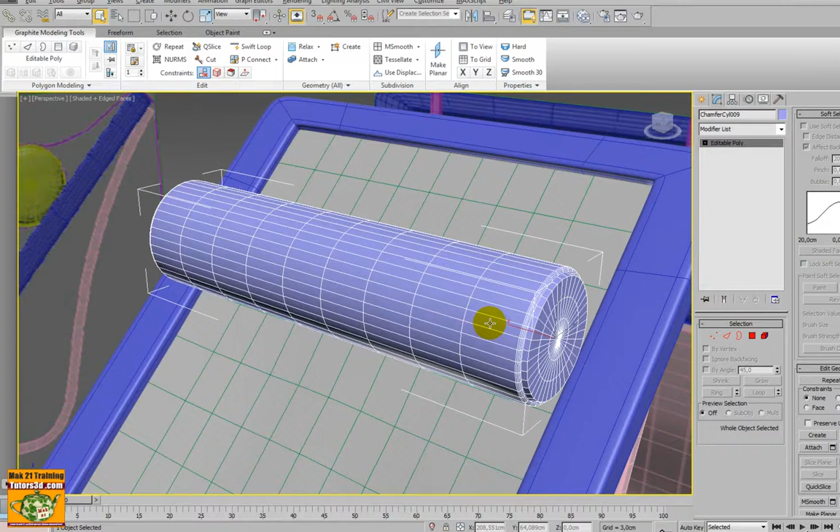I isolate it. We use the tools Clone, Copy. We change the color of the object. We use it as a matrix, then hide the original.

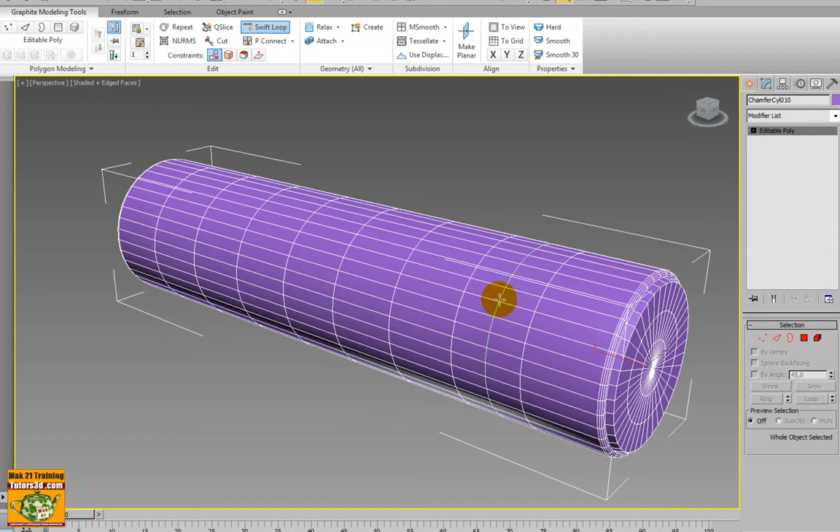We can use the Swift loop. We put it in this position and insert a series of edge.

There will be polygons that are not needed, then I delete it. For example, we eliminate this. We can also eliminate these. We made a ring.

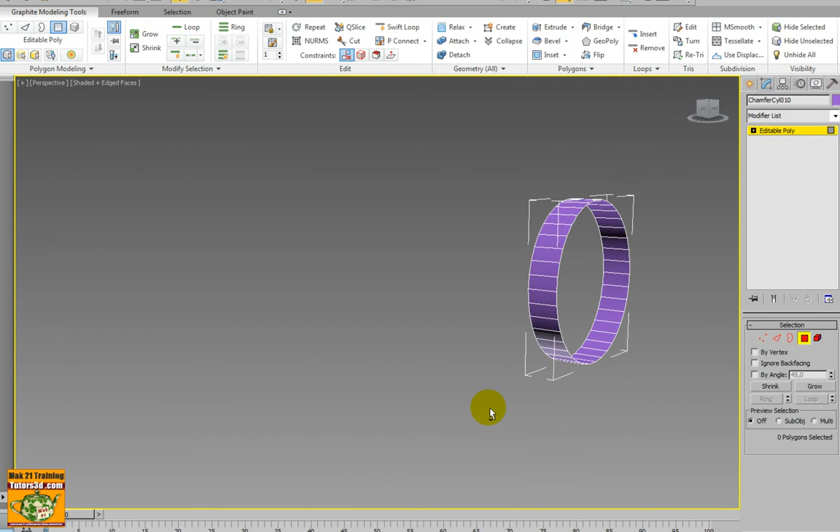Exit isolation mode. We use the command unhide by name. We make visible the original pillow. Here we find our object.

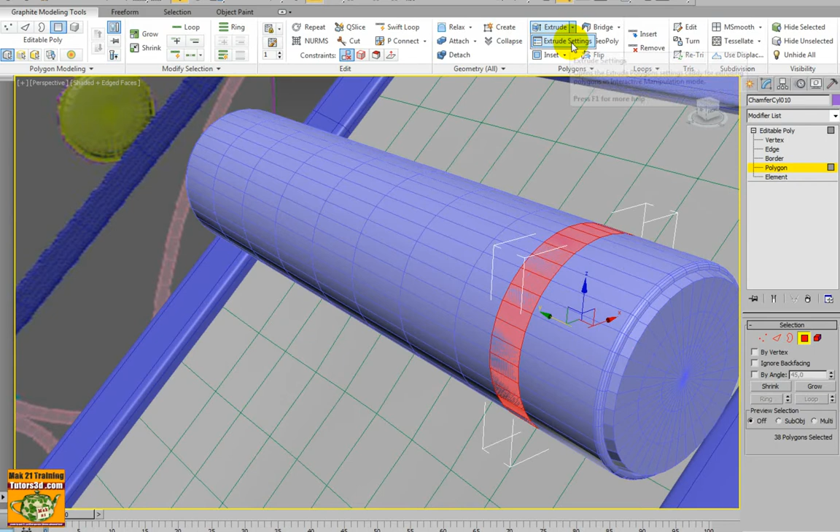Select all the polygons with the keyboard shortcuts, Ctrl+A, and we make an extrusion. At the beginning it is very highest extrusion. Set the local normal, and insert 0.2.

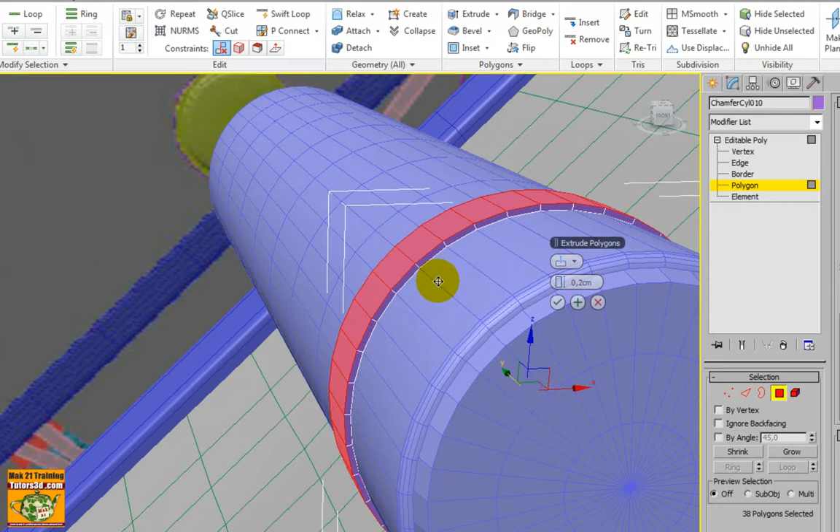Now we see the coefficient for the extrusion. It would be the thickness of the belt. We can do it once, or even several times. If I want the thickness on the segments, we try to insert 3 extrusions.

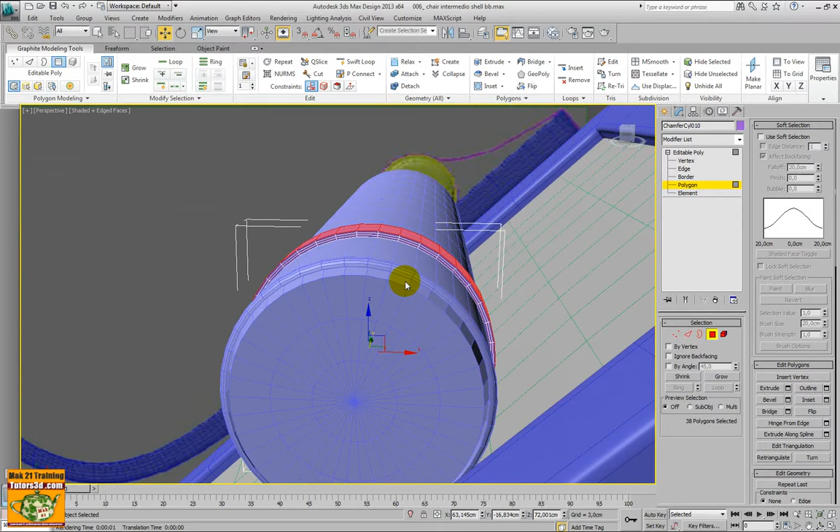Now we need to split this item to create the strap, which stays on the chair. So we do a selection for some polygons.

For example, these polygons. We do it in this position, and we eliminate it. Now we have created a hole.

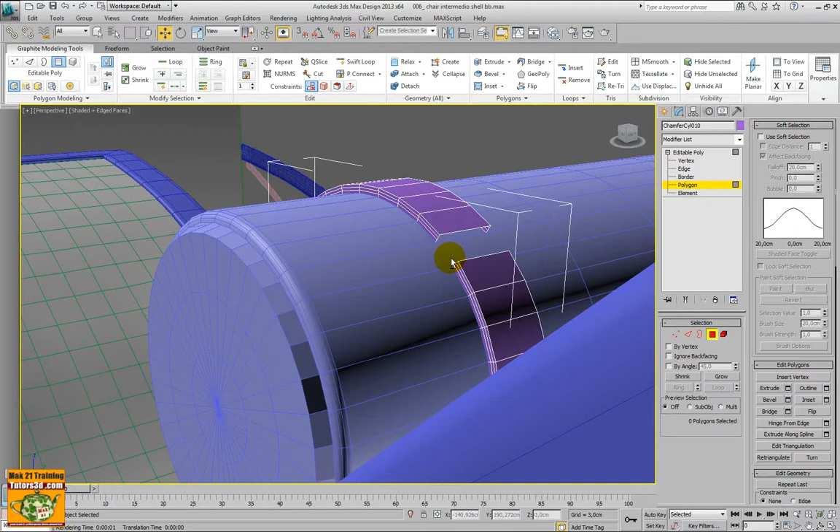We need to close the underside of the belt, before making another extrusion. We need to select the entire profile and then close it.

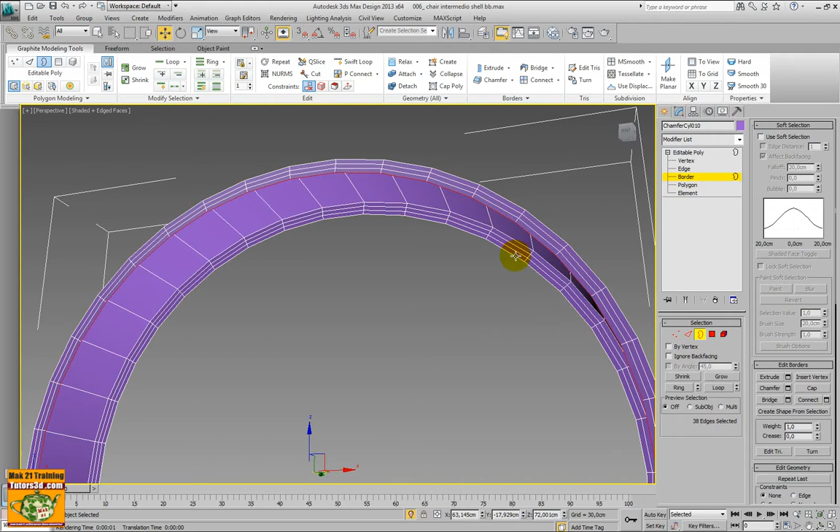We can use the command bridge, and even eliminate the polygons. That are these. Delete.

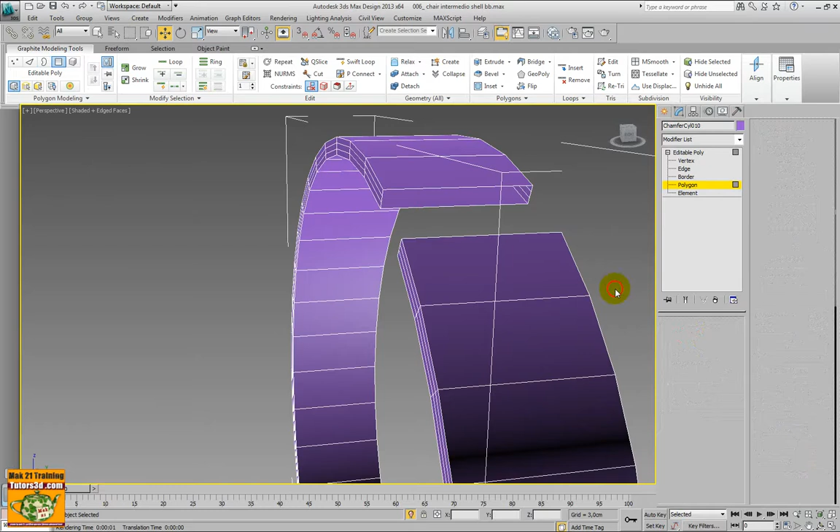Now we can use the border to create the belt. If you move with the Shift key pressed, it creates another set of polygons.

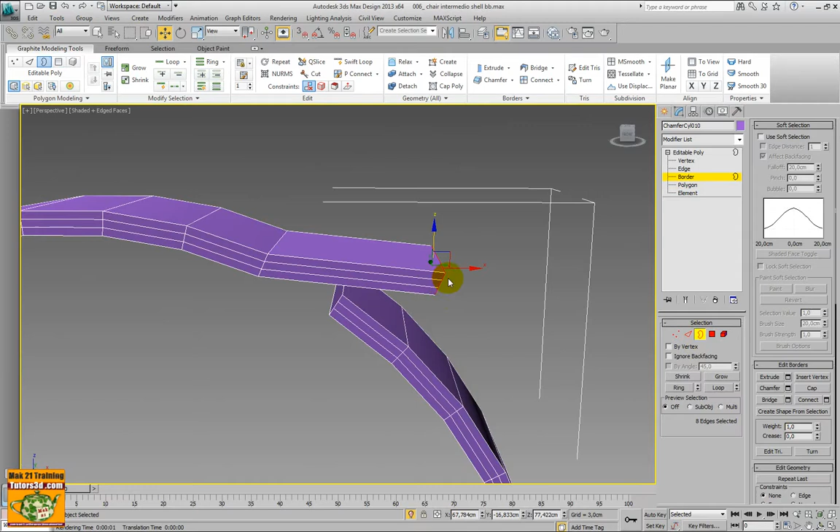The only imperfection of this process is the inclination of the edge, which is not always consistent with our purpose, but afterwards we can rotate it. This procedure is very easy to use.

Now we begin to implement other parts of the belt. We move it, and always use the Shift key during the movement to realize the full shape of the belt.

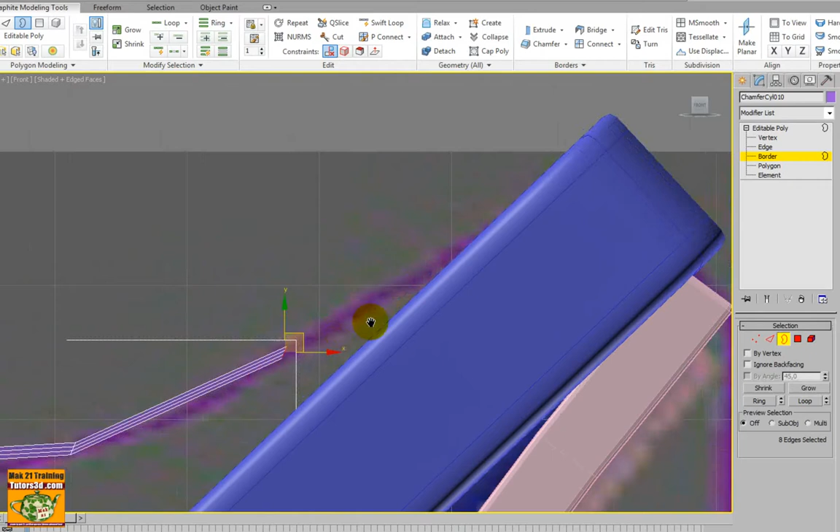At this point we must make a rotation. It is better to move in this way.

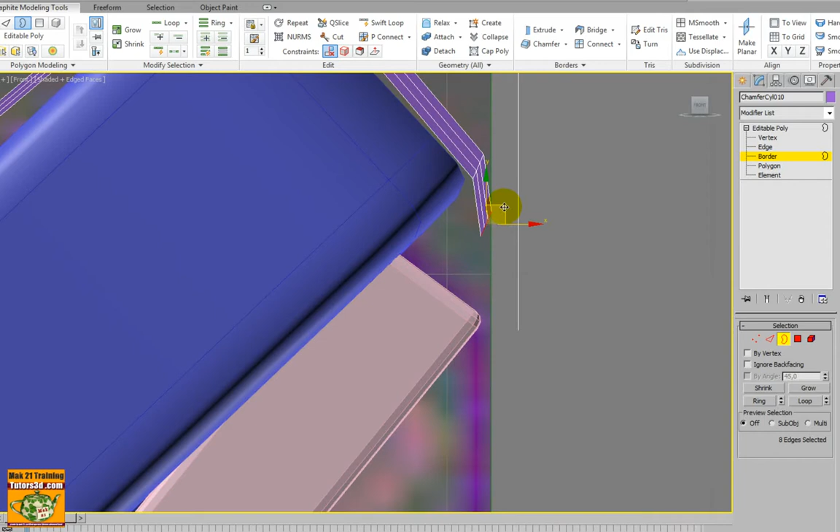When we make the rotation, we must use the correct axis, so as not to deform the disposition of the polygons.

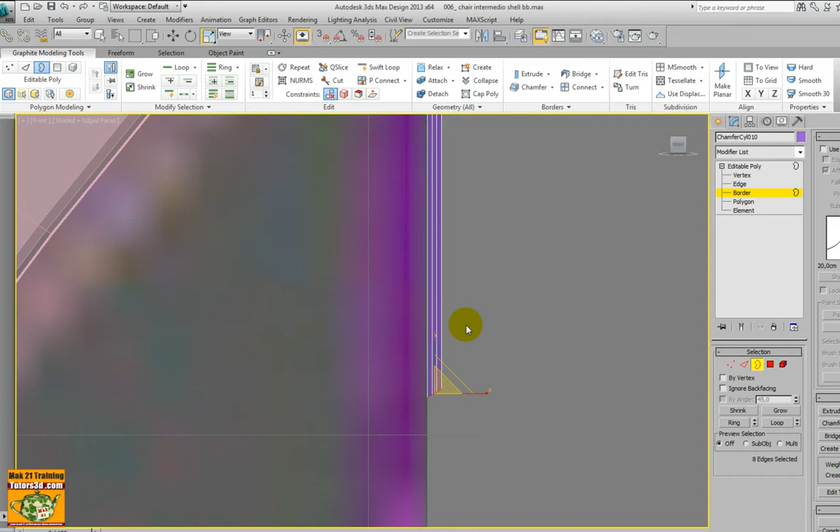We can also use the scale to align the polygons. The scale is an alternative to the command of align, which we used in other lessons. With a scale you need to work on one axis, to align the polygons.

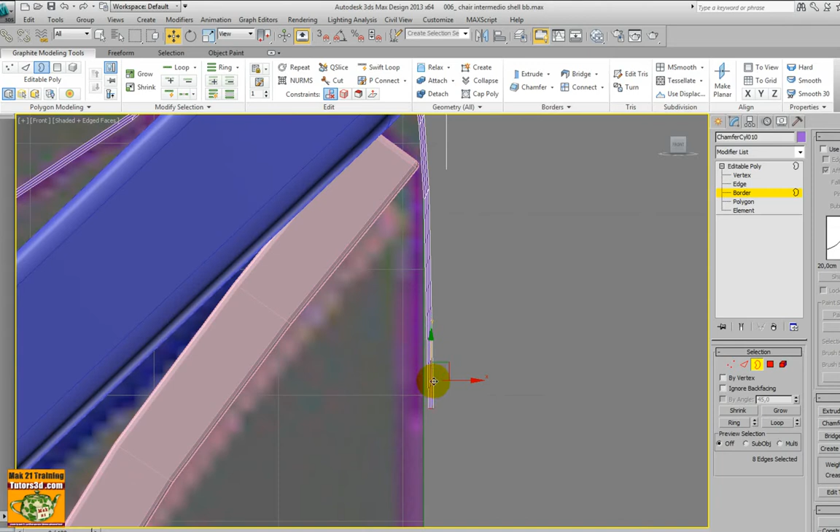Now we can move it, to bring in position. We move it down. Now we check the object in the perspective viewport.

Now in the object there is still present a hole, because this polygon is not closed. We can press the Shift key and do other extrusion downward.

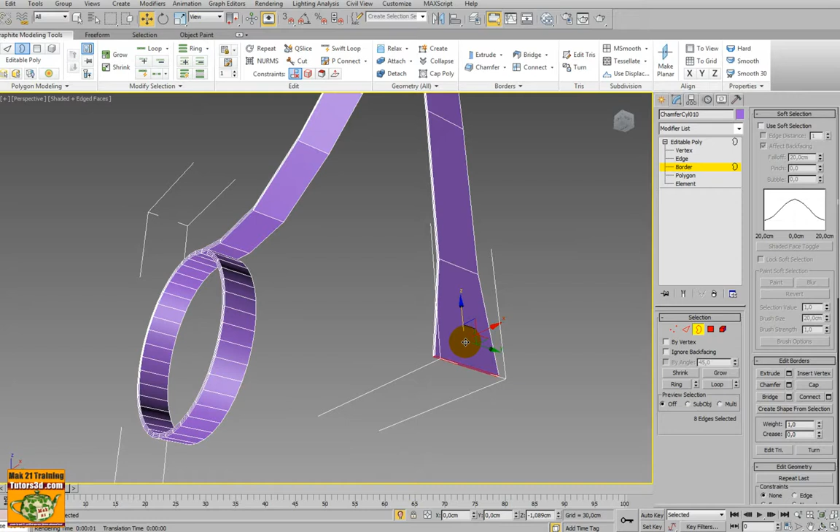For example, to create the final part, we make a scale on the outside for these polygons, and after we move it. If you like this result, we can conclude and close the open polygons.

We can use the cap command. This is a solution to create the belt. We must also close the object in the initial part. So even on this edge, we use the command cap.

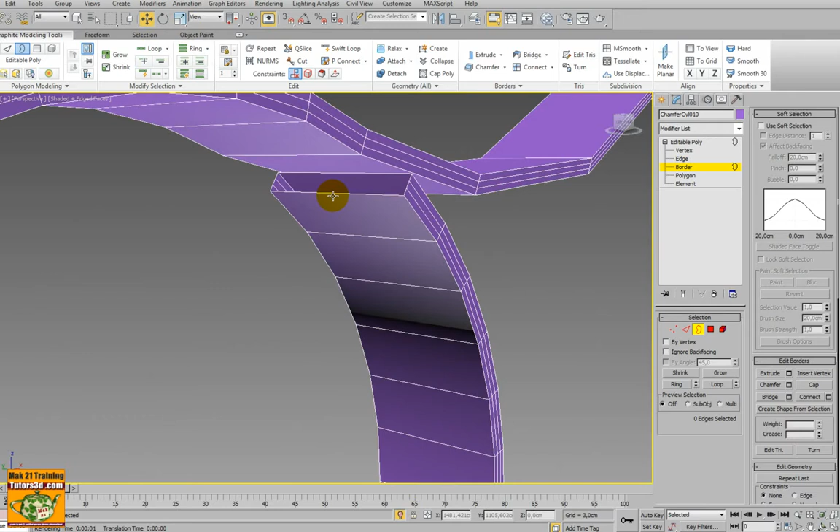Now we insert the details. We use the ring command. We make the selection on the top part, and not in the lower part.

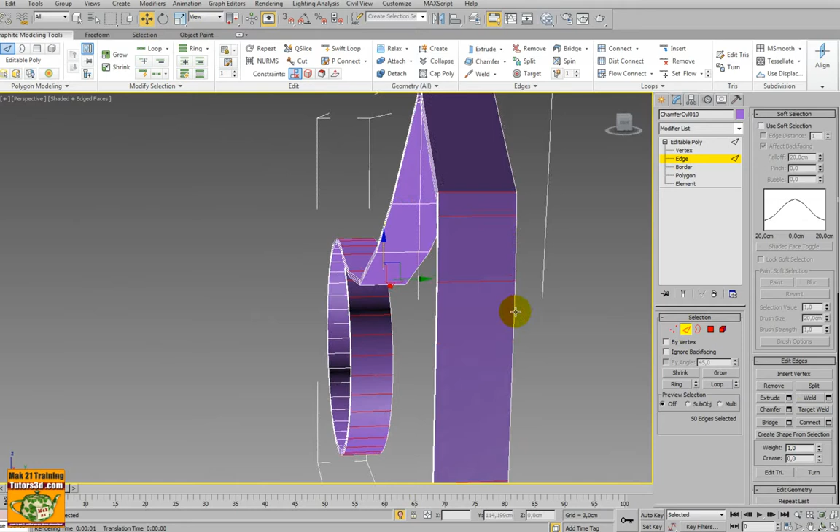It might be useful if you want to work only on a part. For example, if I want to do only extrusions on the upper part. Also here we make a connection.

The connect command is available in many parts of the interface of 3D Studio Max. We use it from the quad menu. We insert two segments. We can also enlarge them.

Then we make another loop selection. With a selection we can use the chamfer. We make one in this position. We select the other edge, and then we can repeat the command.

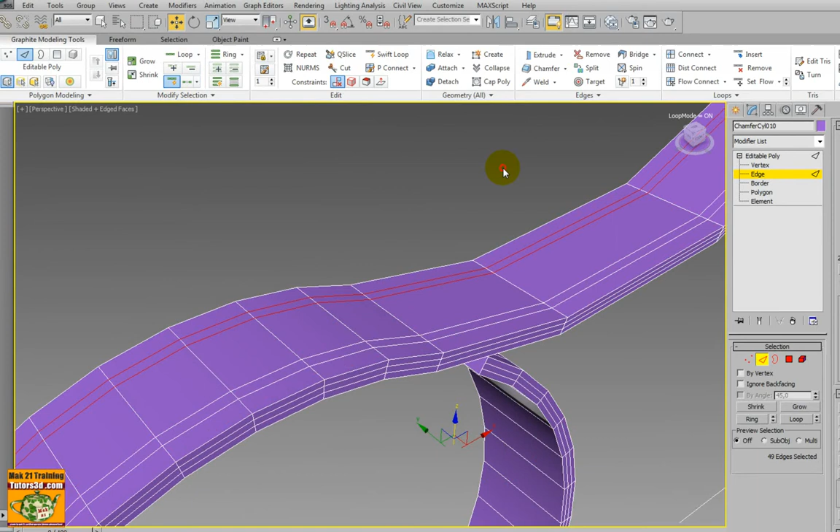Now we can make the extrusion we have already studied in the previous lesson. We select two polygons and make the loop.

We can activate the NURMS to see how the final result is. The NURMS work as the mesh smooth. And we create an extrusion with extrude setting.

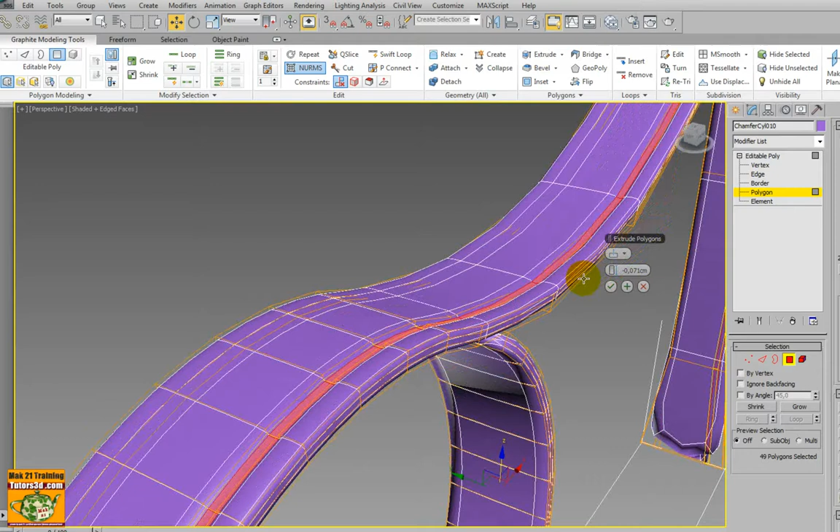We don't exaggerate with the extrusion, and we work on the local normal. We can work outside or inside. You check that the extrusion does not penetrate the object underside.

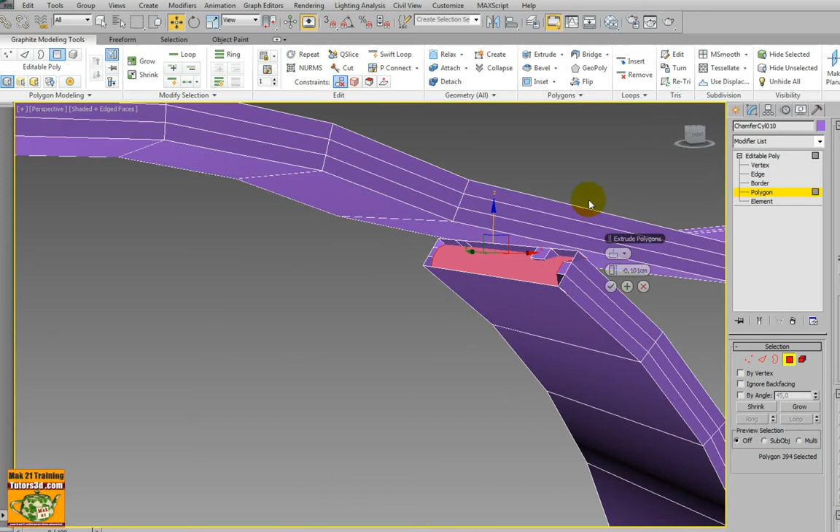Now we can disable the NURMS. Now we select the final part of the polygons that we want to change. We must create small extrusions. We do it on the outside and work on the normal.

We must do the same process on the final part of the object. Select all the polygons and do the interactive extrusions.

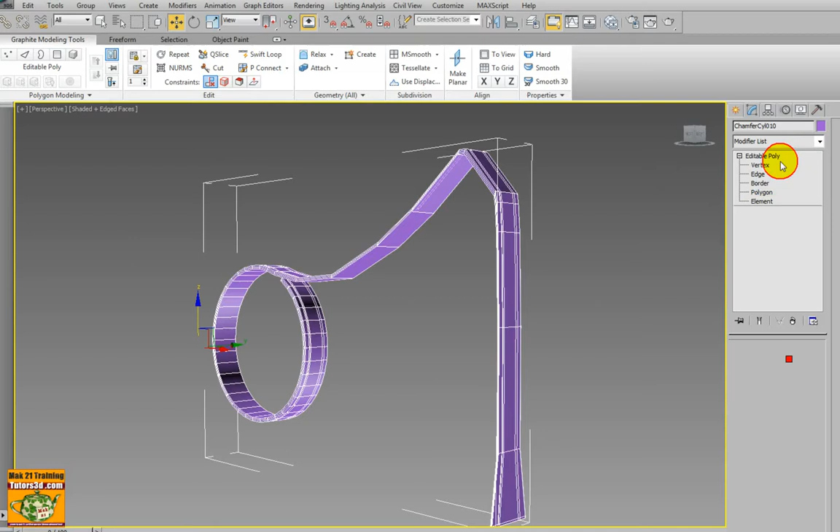Also on this object we use the modifier Mesh Smooth. We can set it with 1 or 2 iterations. It depends on the detail that we want to obtain.

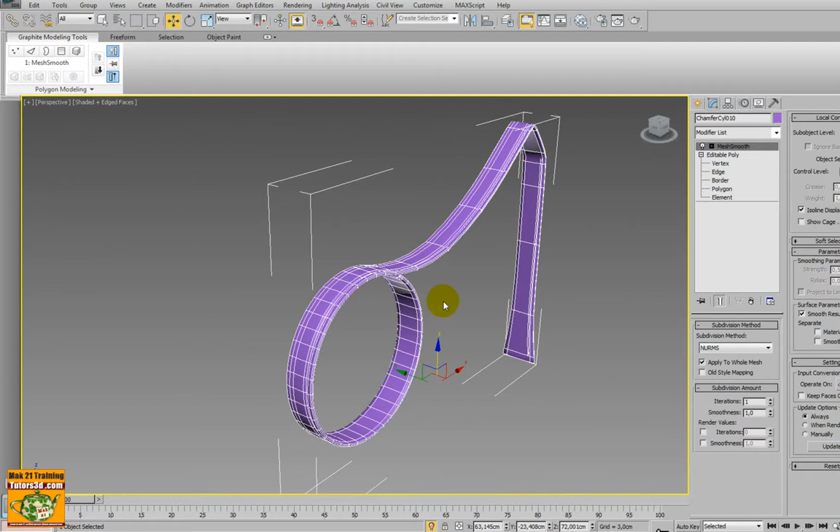We can turn this object to create a copy. But first you need to reset the position for the pivot. Use the option center to object. Now we are sure that its pivot is at the center of the object.

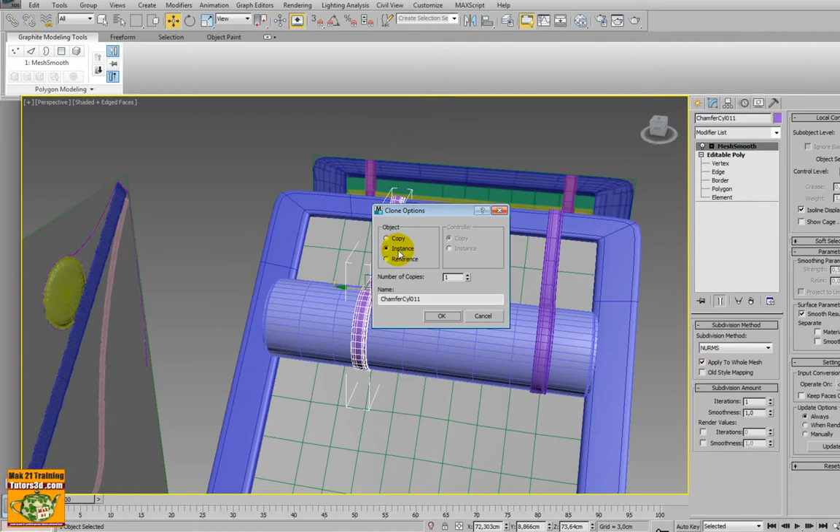And we can make a copy. Use the Move tool, together with the Shift key, and we set an instance. Or we can use the mirror tool.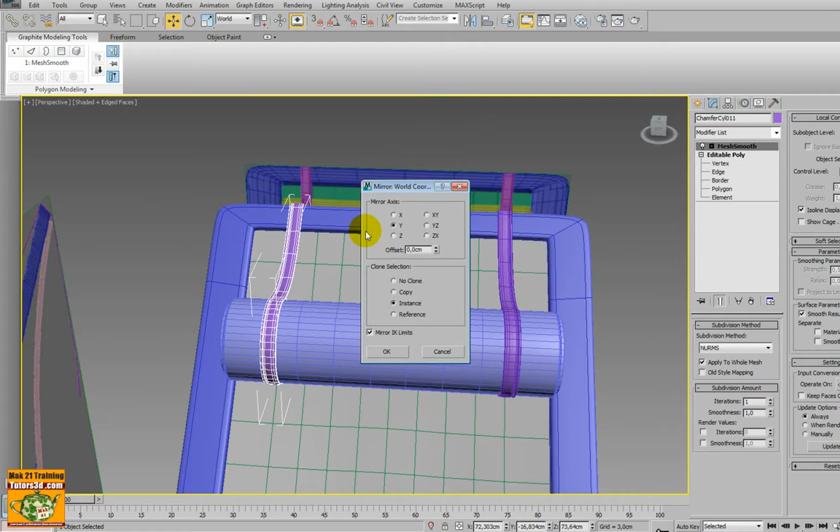Do some tests to find the right setting. We confirm to create the object.

With the instance it's very convenient to work, because each change is reflected to the other object. For example, you can select the vertex to stretch the belt.

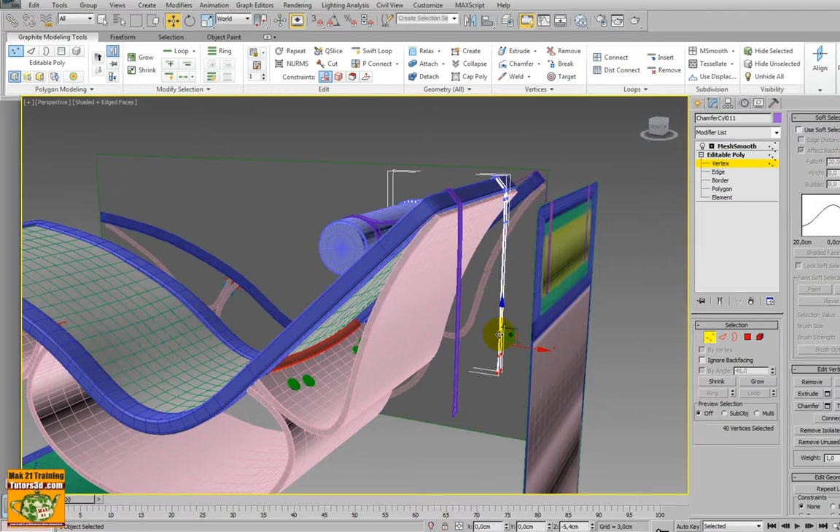We select them and move down. Or move them to the inside. Choose the method that you like.

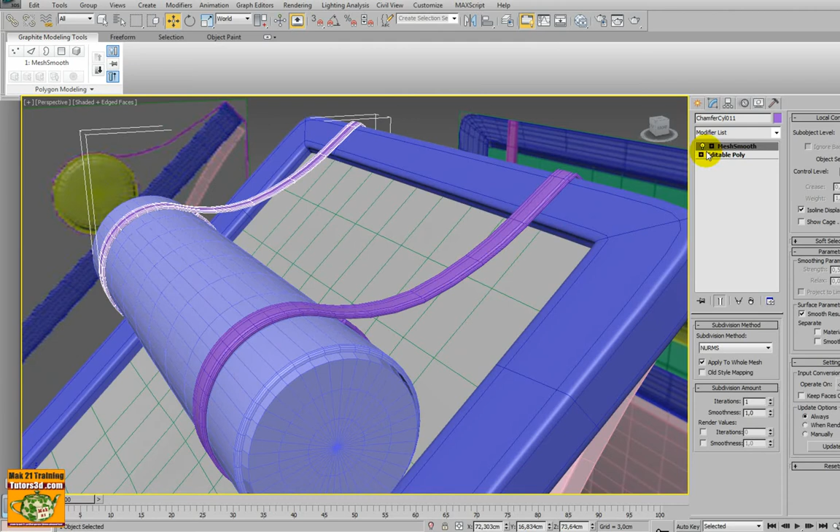At the end, we always activate the modifier Mesh Smooth. Now the belt is already soft. If you prefer, you can increase it to 2.